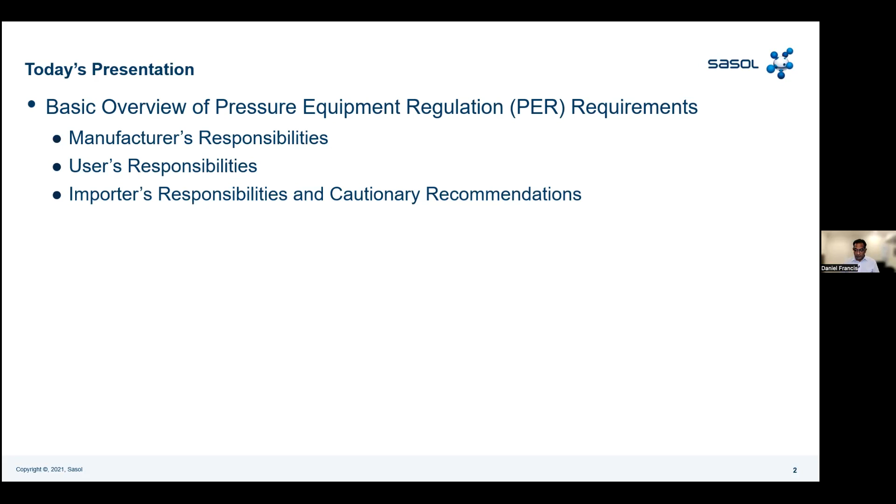And the PER also links to one of the SANS standards, SANS 347. I'll tell you very briefly what those standards cover. We will speak about the manufacturer's legal responsibilities, the user's responsibilities, and also something to note, if you're importing equipment, there are some important accountabilities that you take on the moment you become the importer. So we'll speak briefly about that.

So one of the main reasons for the presentation, of course, is to take you through some of the major changes in the ASME Section 8 pressure vessel code and how that affects the qualification of design professionals and how your responsibilities would be affected there. I would also speak to you when we're speaking about the code changes

about a representation that we're making to the Department of Labor. So just to give you some background, the pressure equipment regulations in South Africa is developed by the Department of Employment and Labor. And they have a forum in which they consult the industry for comments on that. And they take recommendations from the industry as to what should be in the regulations and what might be affecting the industry. And SAIMechE has representation in that pressure equipment forum, and that is actually me.

SAIMechE has nominated me to represent all of you in that, so you do have representation there. This presentation also gives you an introduction to the fact that if you have questions or recommendations regarding those regulations, you can contact the Department of Labor directly, or comment on their drafts. But if you'd like us to address something as an industry, contact me and we can represent that to that forum for you.

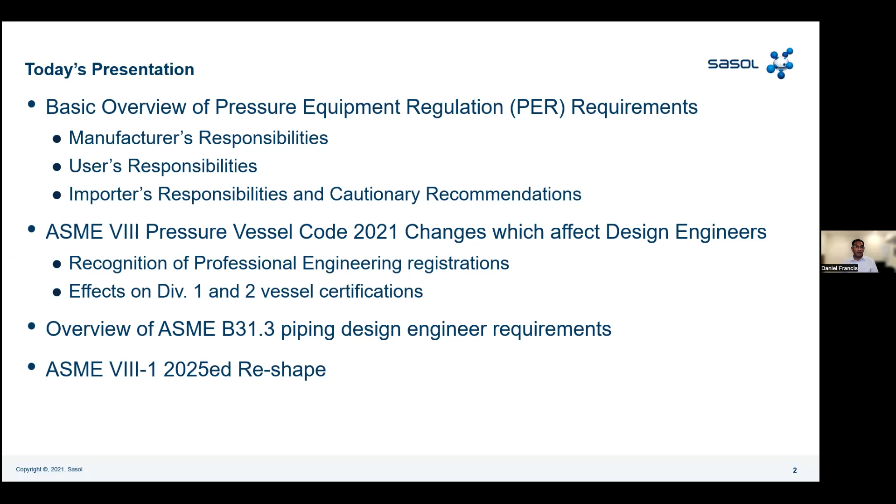Pressure equipment does not just cover pressure vessels. There are also some responsibilities for piping design, and I'll speak very quickly about those in ASME B31.3. Then in 2025, ASME Section 8 Division 1 is going to go through a reshape. Actually, the reshape effort is happening right now. I participate in most ASME development committee meetings, so I'll be able to share with you today some things you should be expecting, especially for those involved in the fabrication industry or engineering consulting industry, or who work for operators that have pressure equipment in your plants. You need to take note of some of the changes coming, because it does affect the way we'll be doing business going forward.

Before we get into the standard, I'll tell you one of the reasons we want to be paying attention to pressure equipment, and why engineers need to work together. Engineers from different disciplines need to work together in our plants to ensure safety.

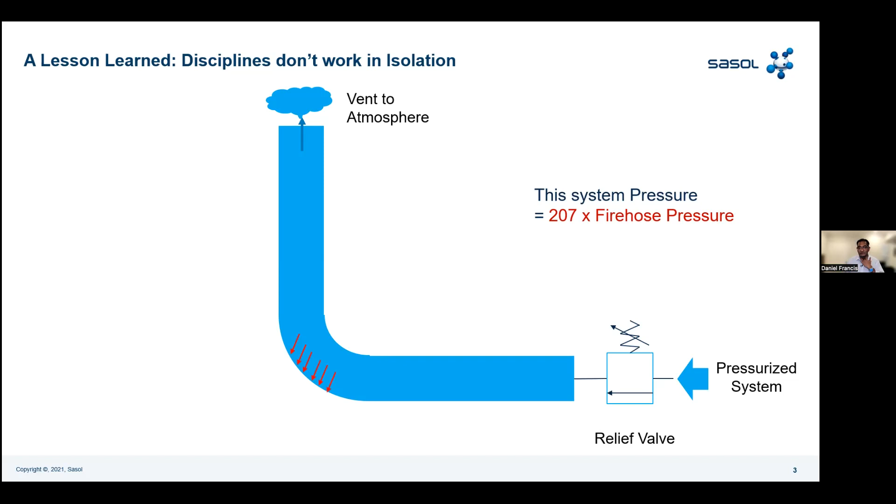You can imagine that when that relief valve opens, at this bend there would be substantial forces induced by internal pressure. You'll have a pressure drop over that pipe, because you're going from a high pressure system to atmosphere. In this particular case study, the equivalent pressure in that system was similar to having 207 fire hoses, or the pressure inside 207 fire hoses - that's the magnitude of force that would have had to be sustained in that area. The number of firemen you'd need to hold a hose, times 207, is the personnel you'd need on site for that.

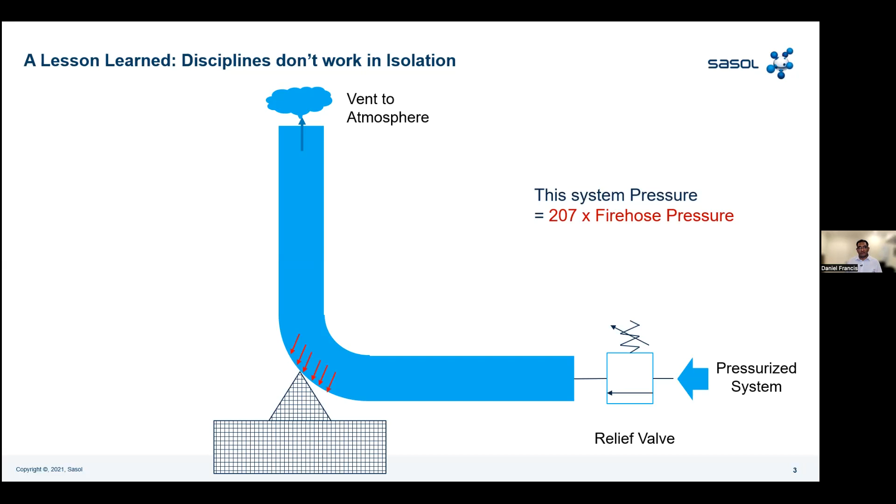But of course, that force is sustained by a structure. Unfortunately, what happened in this instance is that the structure needed to support that force was substantially under-designed. Why? Because the force calculation was not accurate. Generally, the force calculation for such a system has some industry standards to calculate to, but if you have a change in phase of the flow during depressurization, you may have to get more complex in the type of analysis - we may have to do CFD analysis. This is where process engineers interact with vessel engineers, piping engineers, and structural engineers who design the steel support structures.

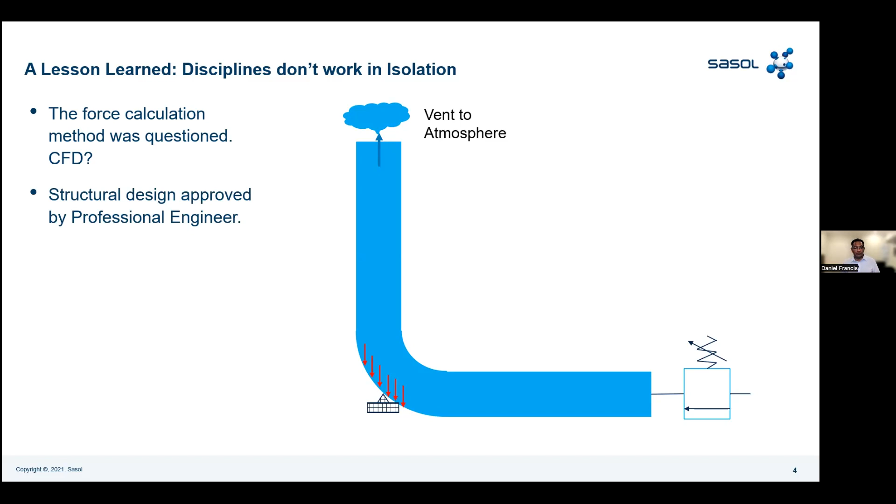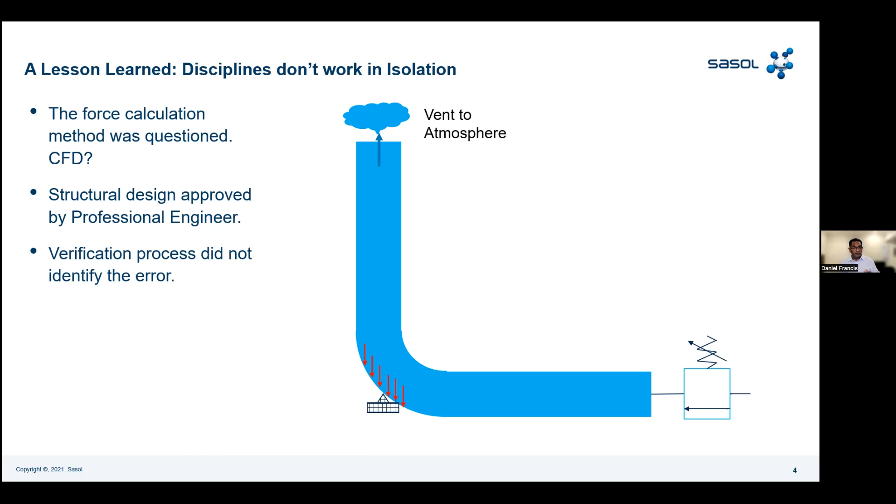We found in this case that the whole design of that structure was approved by a structural professional engineer. However, the verification process within that company - usually an engineering contractor has someone who performs the design, reviews the design, and approves the design, so at least two or three people are involved, and often there's a third-party review as well - none of those processes picked up the error.

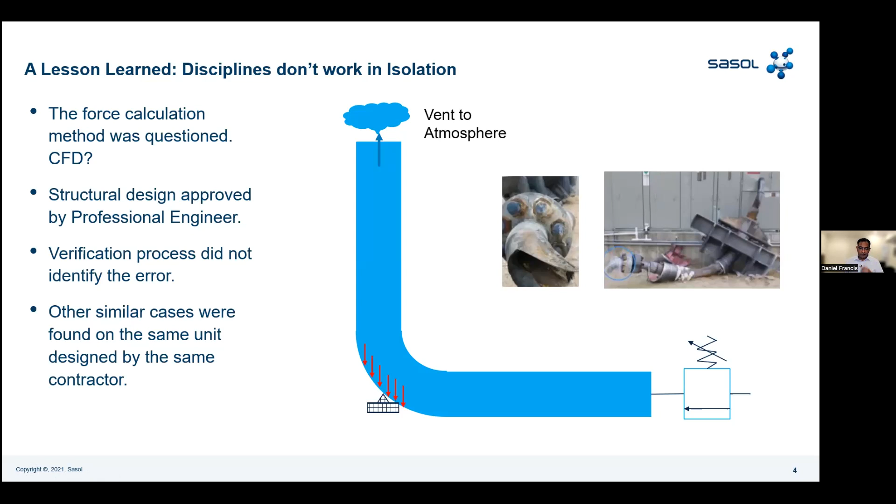So when the design review was done of that plant, we actually found that that same engineering contractor made the same mistake on other plants. They just had not had pressure relief to the extent that this plant had. And you know, a very important lesson there for engineers to work together when it comes to pressurized systems.

All right, so let's get stuck into some of the requirements of the pressure equipment regulations. Firstly, what are classified as pressure equipment?

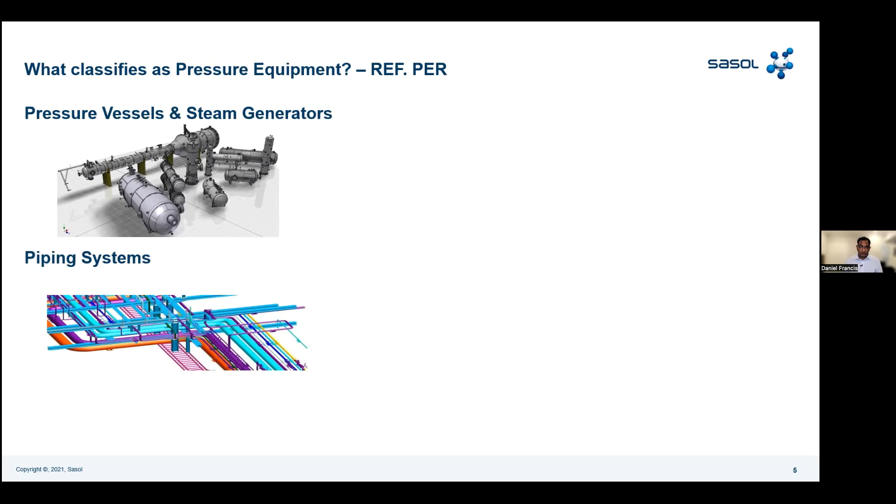Obviously, pressure vessels and steam generators. Steam generators are also referred to as boilers. Piping systems are also pressure equipment. Pressure and safety accessories are included in the definition of pressure equipment in our regulations. And they do include heat exchangers, fired heaters, storage vessels, transportable and bulk containers, fire extinguishers, and accumulators.

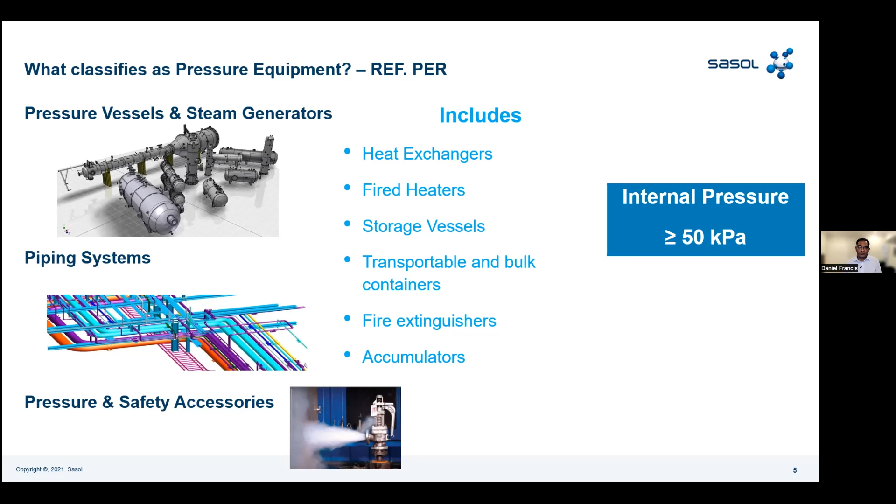In general, if your equipment has a design pressure greater than 50 kPa, it's going to be classified as such. Currently it's greater than or equal to 50 kPa; in the future it will be changed to greater than 50 kPa. If you have a pressure greater than that value, then you effectively have a pressure vessel.

It does exclude certain things, like engines that have a different primary purpose. Hot water geysers smaller than 450 liters are not considered pressure equipment - you don't have to be concerned about the geysers in your homes. And then pressure equipment under external pressure or vacuum conditions only are excluded from these definitions.

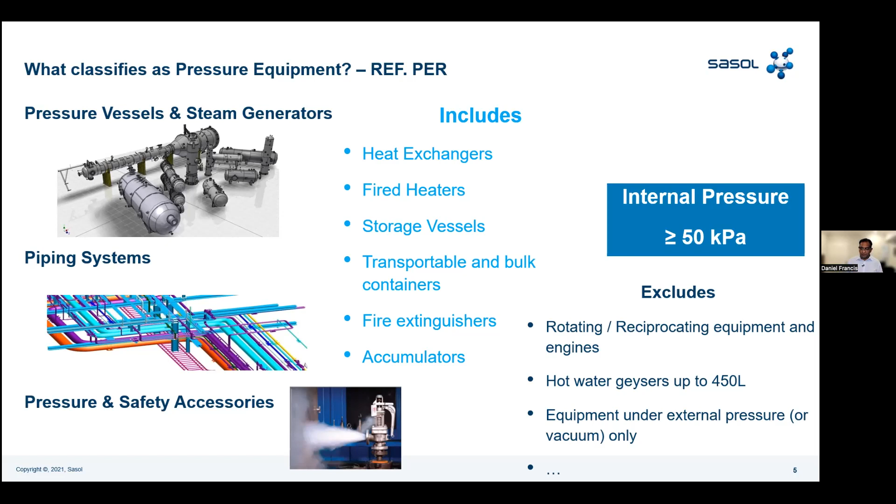Effectively, those are the types of equipment - anything with an internal pressure greater than 50 kPa, and if it's not specifically excluded. There are some more exclusions; I just highlighted the major ones here. But those are the things that are classified as pressure equipment.

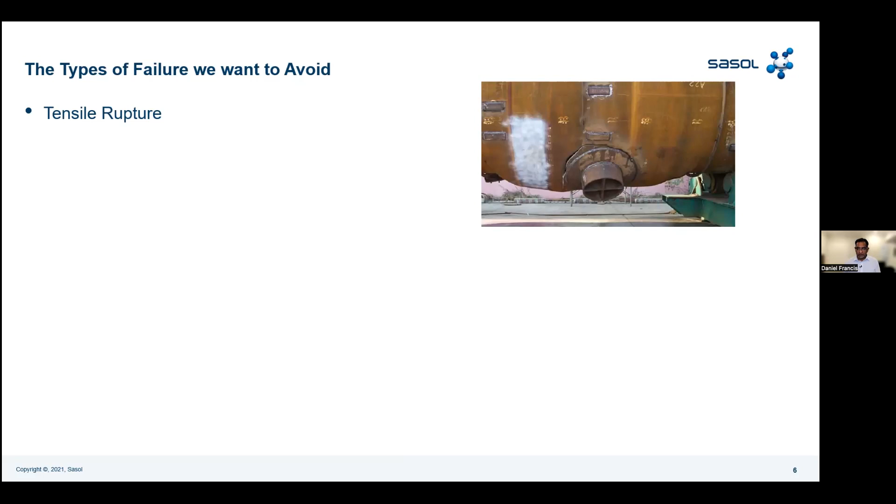Why are we concerned about pressure equipment? Well, the case study we discussed earlier is one reason. But we want to avoid failure mechanisms such as tensile rupture. You can see in this picture where equipment was substantially overpressurized and you have a tensile rupture. Fortunately this was not something I was ever near, but compressive or buckling failure under compressive stress is also something we want to avoid.

A nice picture there of a brittle fracture, where equipment was embrittled during service due to service conditions. And when it was shut down for maintenance, they did a pressure test on it, and the metal had embrittled such that the pressure test caused this type of failure. It's a very clean type of brittle fracture, completely irreparable kind of thing.

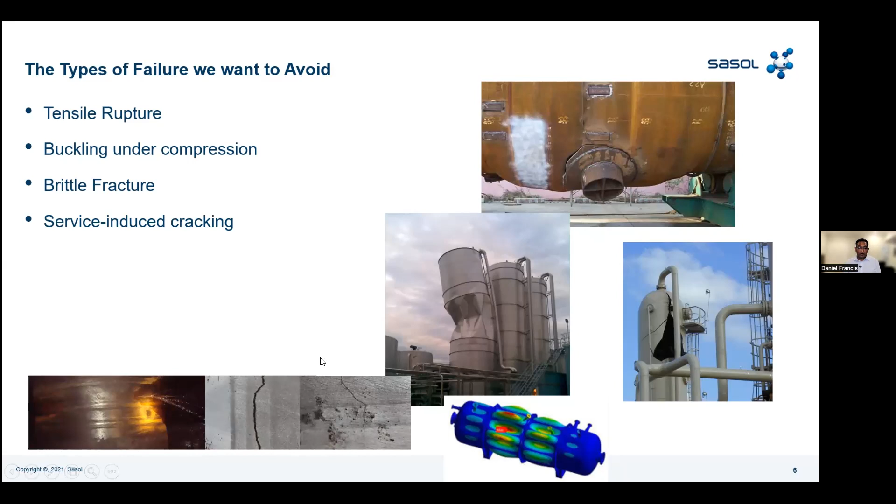We want to avoid that, and pressure vessel codes do have rules to help you avoid that. In-service cracking - if you have things like stress corrosion cracking on pressurized equipment, you could have a progression of cracking over time, and you want to avoid those things. Metal loss, relatively easy to understand - corrosion or erosion. And then we want to avoid manufacturing defects and any kind of leakage, even in flange joints.

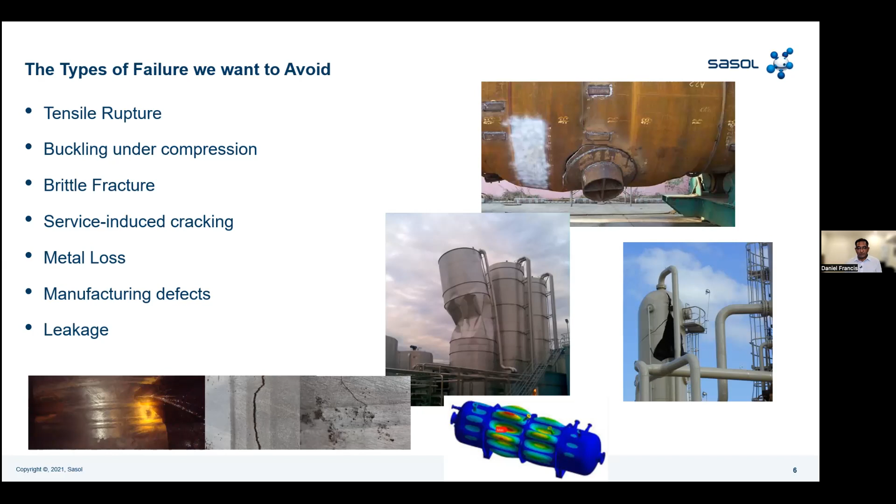We want to regulate pressure equipment so that we don't expose the public to dangerous product effectively - not just the public, also the environment.

All right, so where do the pressure equipment regulations fit in? They are part of the Occupational Health and Safety Act. So for those of you who have the OHS Act book in your office, you will find Regulation 17, which is the pressure equipment regulations in South Africa. Pressure equipment regulation does act together with SANS 347. SANS 347 is referenced by the PER, so it becomes part of the law effectively.

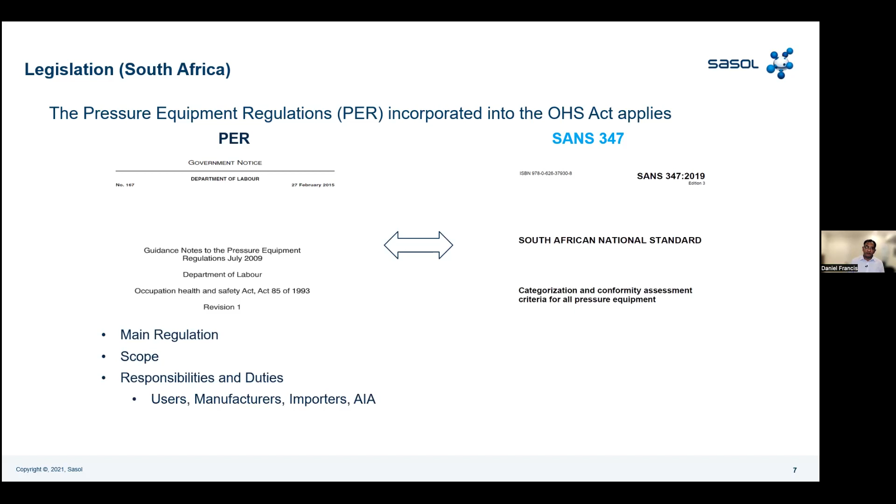What do these two things cover? Well, the PER covers the main regulation. It contains the scope of what is classified as a pressure vessel, where these rules apply and where they don't apply. It does have the main responsibilities and duties of users, manufacturers, importers, and the third party, the Approved Inspection Authority, or AIA. It does cover new manufacture, maintenance, and inspection.

And the PER, importantly, requires compliance to a health and safety standard. So the PER, the regulations in South Africa, do not give you rules as to how to calculate the required thickness of a pressure vessel - that you would get from the health and safety standard. How to weld it, what materials are allowed and what are not allowed - those are contained in the pressure vessel code or the health and safety standard.

In SANS 347, what that standard does is it classifies equipment based on the fluid type, the pressure, and the size.

Based on that classification, there are certain requirements for what it calls conformity assessment. If your vessel is considered more critical based on the fluid, the pressure, and the size, you would have to perform more verifications on it. It's effectively the purpose of SANS 347. It's a conformity assessment document, and whether your manufacturer has an approved quality system or not determines the amount of inspections that are performed by a third party.

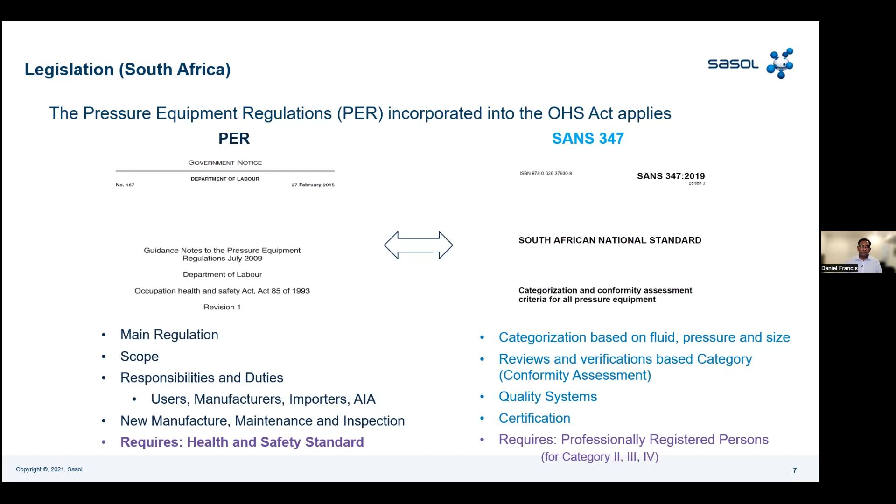But for category 2 equipment and higher, where most industry equipment is actually classified, you need the involvement of a professionally registered person to comply with the local regulations.

I said earlier that the PER doesn't have the rules for your calculations. You need to go to a health and safety standard for that. There are several around the world, and the most common is still ASME, the American Society of Mechanical Engineers. It has several codes - section 1 for boilers, section 8 is pressure vessels, which we're going to focus on a bit today.

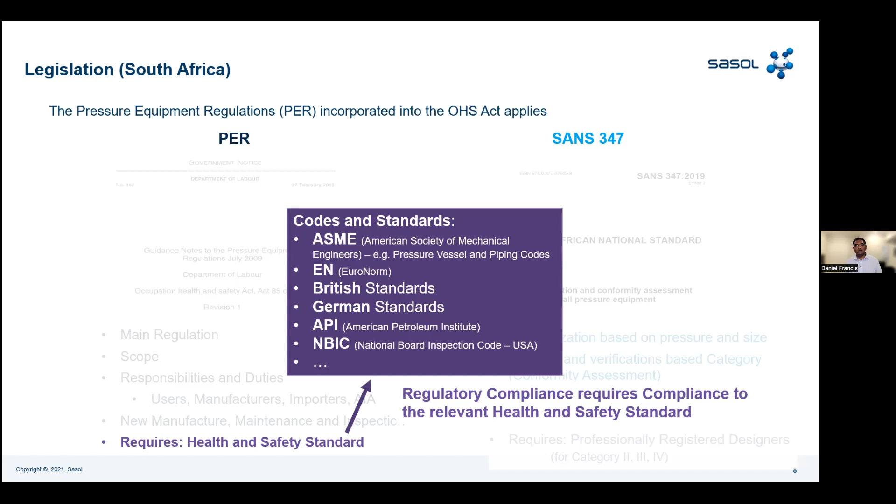The law in South Africa does allow you to design to other standards as well. Ultimately, regulatory compliance does imply you have to comply to the code. So if you have an ASME stamped vessel in South Africa, it needs to conform to ASME. And if it does, then it conforms to the South African regulation, provided all the other requirements of the regulations are met.

Okay, so let's spend a little bit of time speaking about manufacturers' responsibilities. I think this is quite important to cover because it's actually one of the reasons for the way the pressure equipment regulations are structured here. The manufacturer, as defined in the PER, must have or must hold overall accountability, overall control for the design, fabrication, testing, and certification.

Whenever you appoint a manufacturer to provide you with pressure equipment, you should ensure that they are capable of taking on those accountabilities. There are cases where a design contractor or an engineering contractor, even a user, might perform the design themselves and appoint a contractor to manufacture in accordance with that design. When you do that, you have to determine who has overall control of that process.

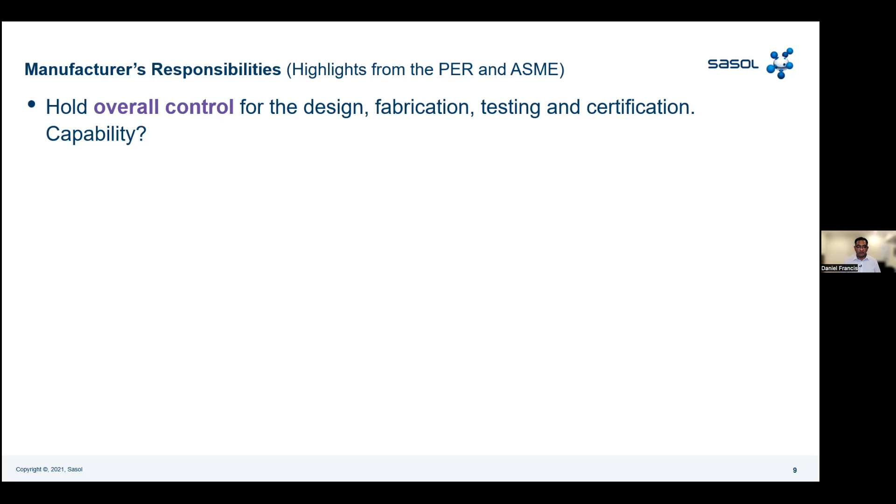And if it is the user or the design contractor that has that overall control, they would be deemed to be the manufacturer. There is some legal accountability that goes together with that.

So one of the responsibilities of the manufacturer is that the manufacturer needs to ensure that the equipment is safe and without risks to health when it is properly used. The user must use it in accordance with the design conditions. However, the manufacturer should ensure that it is safe and without risks when operated under those conditions. It's a simple statement to make, but there's a lot of accountability that goes with that. You need to always ensure the manufacturer is capable of taking on that accountability.

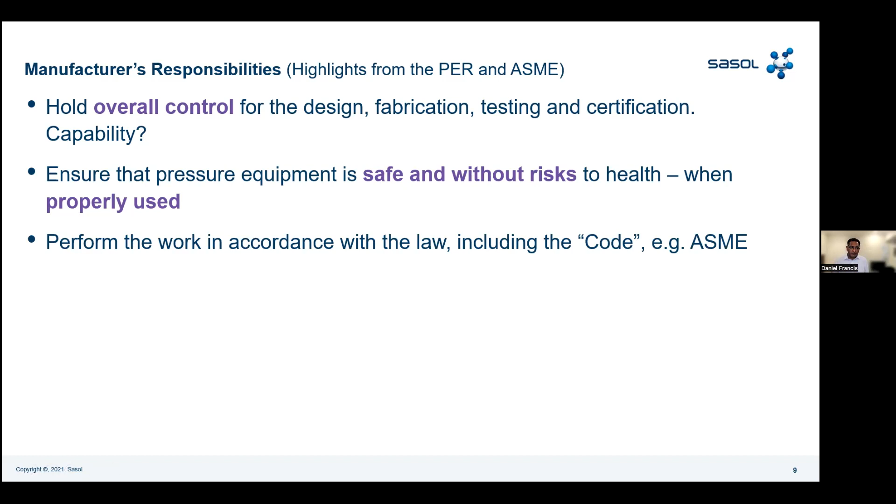So the manufacturer must perform the work in accordance with the law, including the code, which is incorporated into the law by reference. The manufacturer must also appoint an accredited third-party inspection agency to oversee the work. The user can appoint such a party as well, but there must be a third party appointed. In South Africa, we call that the Approved Inspection Authority, or AIA.

And if you're importing equipment, if it's ASME equipment, it'll be an ASME authorized inspector that is the third party. For equipment imported from Europe that is CE marked, you would have a notified body that is the third party. Then the manufacturer must also issue a certificate of compliance that is countersigned by the third party.

One of the responsibilities of a manufacturer is after they release the vessel, if they find defects in it, they need to report that to the user, and together with the user determine some kind of rectification plan.

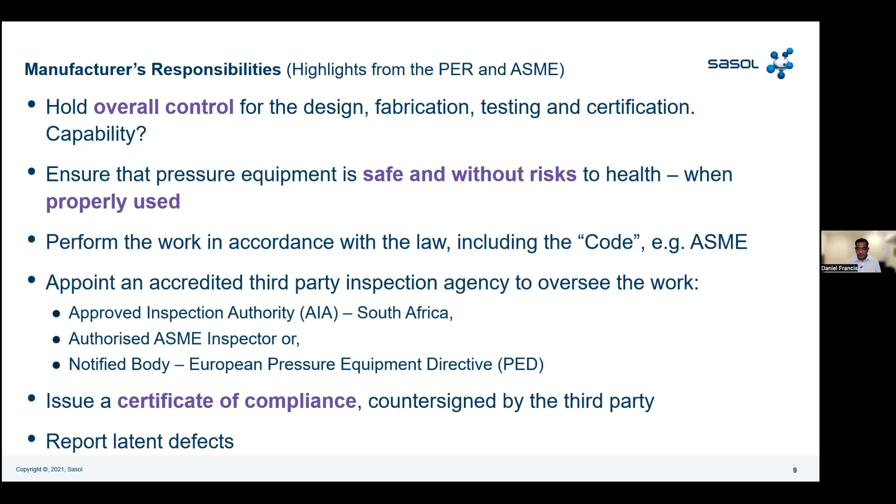Sometimes things go wrong with the manufacturer's responsibility, and I wanted to share this experience with you. This happened on equipment where the engineering contractor expected the manufacturer to comply, and in the same way, all of us in the industry order equipment expecting manufacturers to comply. There are certain things you just do not see, but things do go wrong. So what happened with this particular column?

Half of the column was being replaced. It was going to be cut towards the bottom, and an engineering contractor was going to take that away and bring in a new piece to replace the top section of the column that had undergone some kind of corrosion. So the engineering contractor ordered this top piece of the column from a local manufacturer, who manufactured it, pressure tested it, sent it to site, and it was being installed in the equipment.

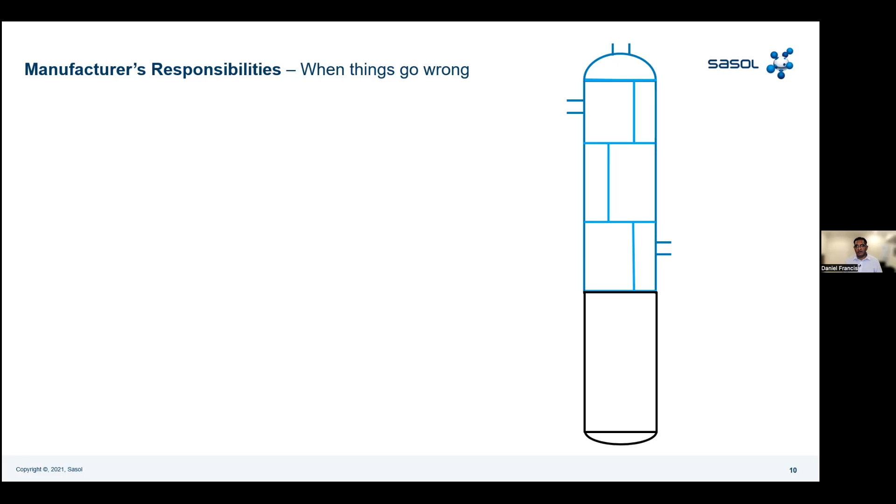While it was being installed, an anonymous whistleblower contacted one of the plant managers and said there were some defects in the weld that were not properly repaired, and the equipment was released in that condition. Let me give you a quick explanation as to what the defect was.

If you look through the wall thickness of this steel, the base material is a high strength steel, and all the strength comes from that. What I've shown here is a weld equipment, or the wall was welded from both sides. On the inside was a low strength corrosion resistant cladding. This is a common type of arrangement where we need corrosion resistance on the inside. It's expensive material, so you use the high strength material effectively to carry your design load. What the manufacturer did is, after they had applied that cladding, they found there were a lot of defects in the weld below.

So they excavated that weld. That's okay to excavate the weld, but after you do that, you need to fill it up with high strength material, because your design thickness is dependent on that strength. However, what they did is they filled up the entire weld with low strength cladding, and effectively the material we had to carry the load was less than one-third of the required thickness, or of that original design thickness.

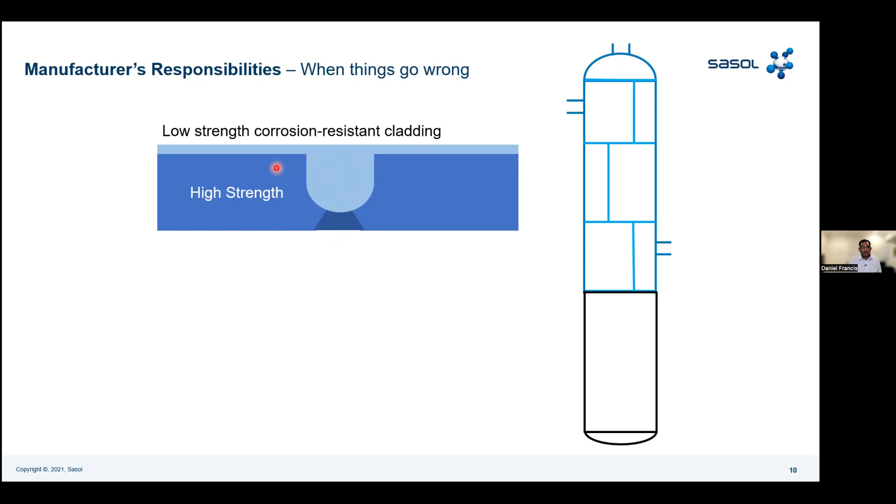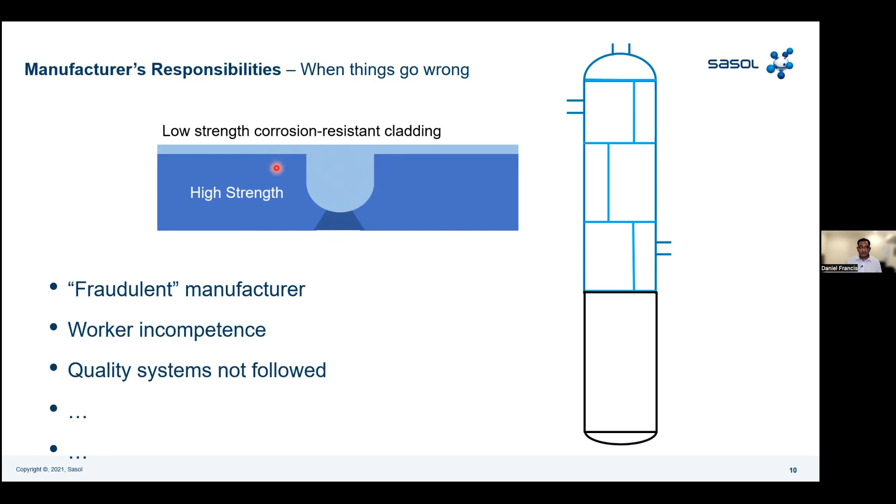So these things do happen in industry. Of course, a lot of repairs had to be done. I guess we can call it a fraudulent manufacturer, worker incompetence, quality systems not followed - a whole host of things went wrong. Unfortunately this does happen in the industry, and you never know when a good manufacturer might stop being good like you knew them to be.

I wanted to highlight that we'll speak a little bit later about importers' responsibilities, but I think it's important to note that although the law doesn't require the user to perform any kind of quality management - it requires only the third party to do that - it is in the user's interest to perform some kind of quality management on pressure equipment while it's being manufactured, especially those critical ones.

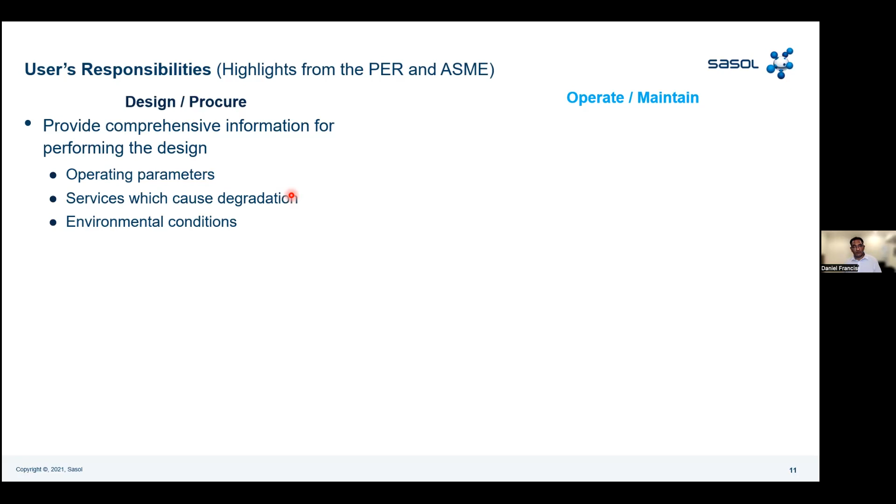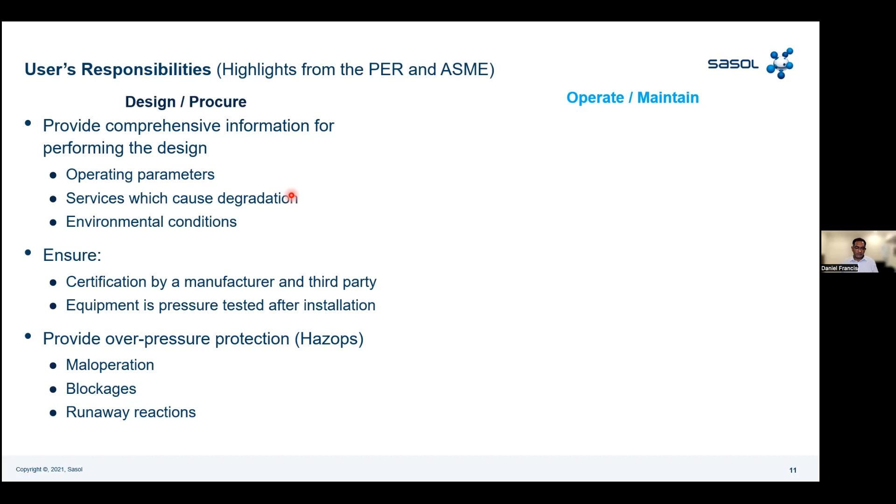The user's responsibilities in terms of the law are to provide comprehensive information to perform the design. The manufacturer cannot perform the design unless you provide him with that comprehensive information - operating parameters, services that can cause degradation, environmental conditions, etc. The user must also ensure there is certification by a manufacturer and a third party. You must have that certificate of manufacture, and that the equipment is pressure tested after installation. The user also provides overpressure protection in many cases, and is involved with things like HAZOPs to determine that the equipment is protected against maloperation, blockages, runaway reactions, that kind of thing. So that's during the design and procurement phase of a project.

But some of you are operating equipment. The pressure equipment regulations require, in that case, that users must inspect and test pressure vessels and steam generators every 36 months. You may replace that with a risk-based inspection program. There are some additional provisions and exceptions, but that's effectively one of the main requirements of an operator.

If you perform any repairs or modifications, you need to appoint a manufacturer, repairer, or modifier that will take responsibility for that and effectively implement all of the other regulation and code requirements during that repair or modification.

There's something else that happens in service equipment, and that's what we call fitness for service assessments. Sometimes there could have been localized corrosion on equipment, and you determine through advanced analysis that it may still operate. There are actually fitness for service standards out there in service inspection codes that refer to fitness for service industry practices you can use to qualify your equipment.

The OSH Act also allows this, the PER allows it. In some cases, I've found that users don't get that design or fitness for service assessment verified by a third party. This is something for you to note - the law does require that it must be verified by a third party.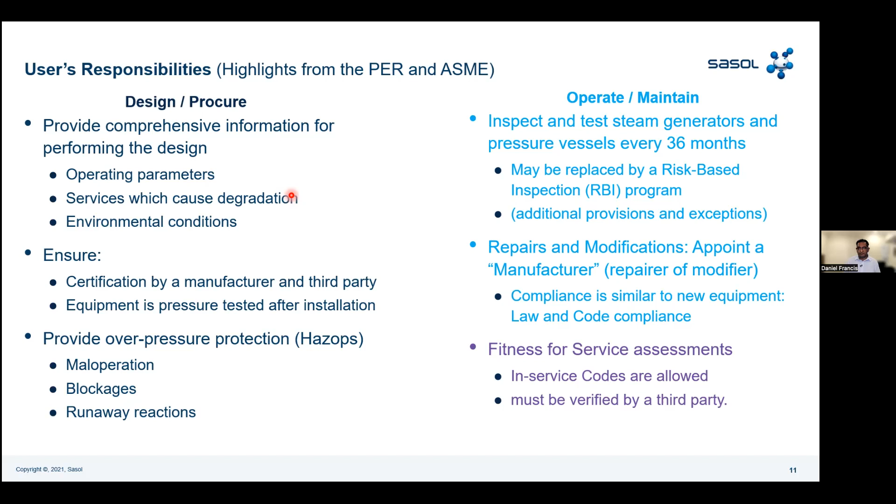All right, that's as far as users' responsibilities go, the summary thereof in the PER. The importer does have responsibilities specifically mentioned in the regulations. The importer assumes the liability of the manufacturer in terms of the pressure equipment regulations.

What this means is all those responsibilities that we saw earlier of the manufacturer, for example, ensuring that the equipment is safe to use and without risks, etc. - all of those responsibilities fall on the importer of the equipment. What that means, of course, is if the equipment fails, the importer will have to answer.

And the reason the PER states that is that the law or the regulators want to have a juristic person in South Africa to go to if something goes wrong on your facility. So when you are importing equipment, you need to be prepared to take on that accountability.

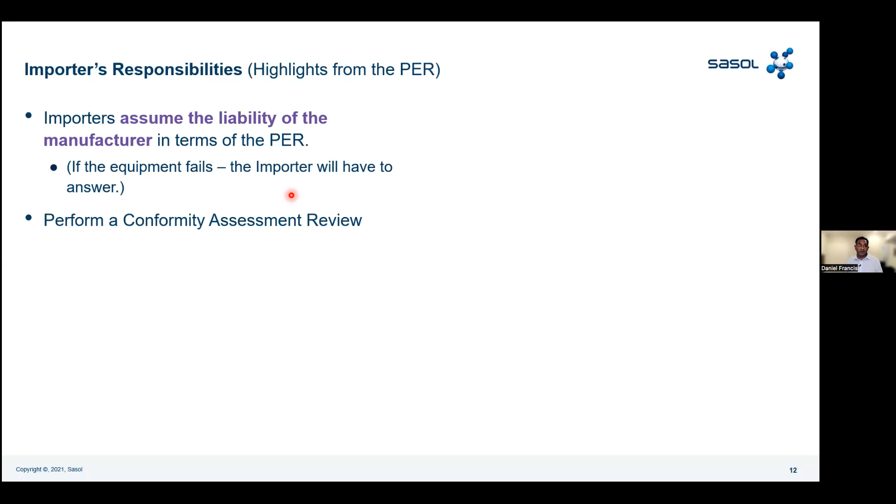How do you do that? Well, you perform a conformity assessment review. You'd also have to appoint an AIA, approved inspection authority in South Africa, to review that conformity assessment.

I've just put in some notes here as to what we recommend when you're taking on that accountability of the importer for such equipment: appoint only dependable manufacturers, perform 100% document verifications, at least document verifications, and align on all technical requirements, including frequently omitted code requirements, with the company manufacturing equipment for you that's located outside of South Africa.

You also perform critical physical inspections. Go to those manufacturers for critical equipment and arrange for frequent inspections on those critical aspects.

Appoint local independent inspectors when that makes sense. Sometimes you can't be there all the time, but you can get a third party and appoint an inspector in whichever location around the world. Also consider random checks, sometimes which the manufacturer might not expect.

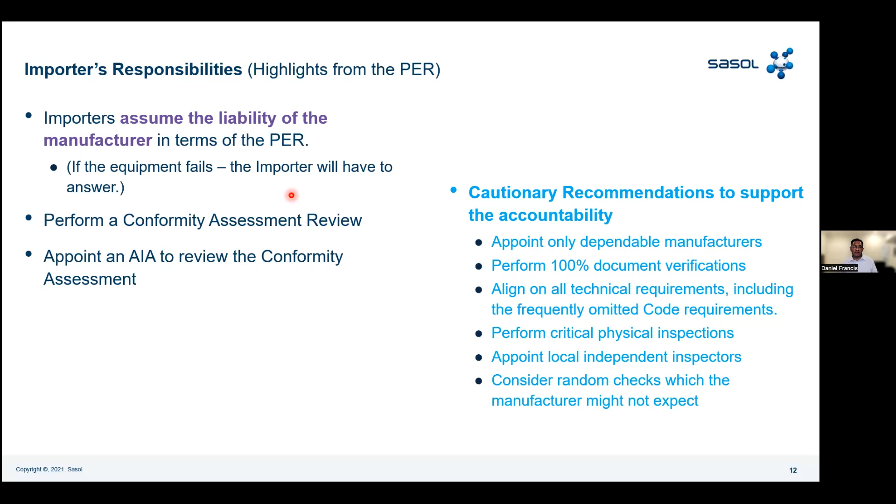I've done that on several occasions - we had critical equipment in India, and I would pitch up at the manufacturer during the night shift, make arrangements to get to the site with the third party that we had there, and just go there and ensure that they are following procedures even at night, because that's when things sometimes go wrong.

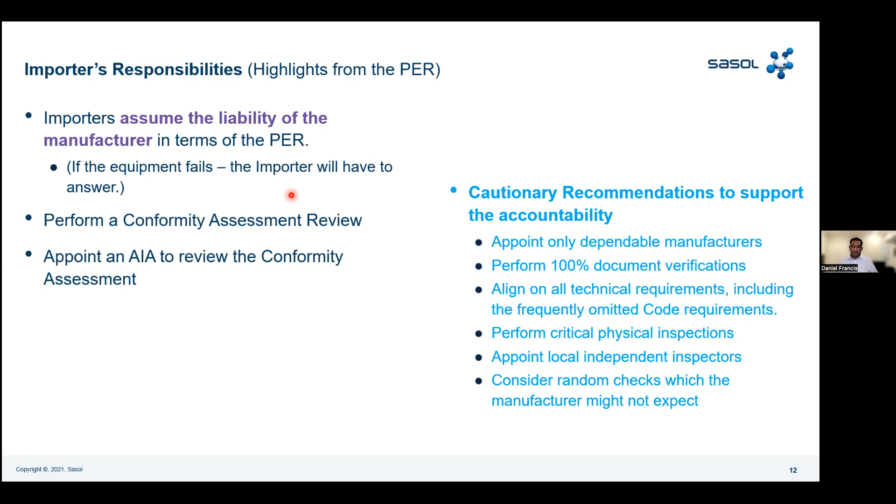So those are responsibilities of the importer and some recommendations as to how you can mitigate some of the risks you face when you take on those accountabilities. As professional engineers, let's do the right thing and ensure that we don't just rubber stamp importer conformity assessments, but that we have some level of confidence, especially when we have critical equipment.

All right. I've listed here some of the common pressure equipment health and safety standards. Under ASME, Section 8 pressure vessels is what we're talking about today, and the responsibilities of design engineers there. There's Section 1 for boilers, and there's several other sections, by the way.

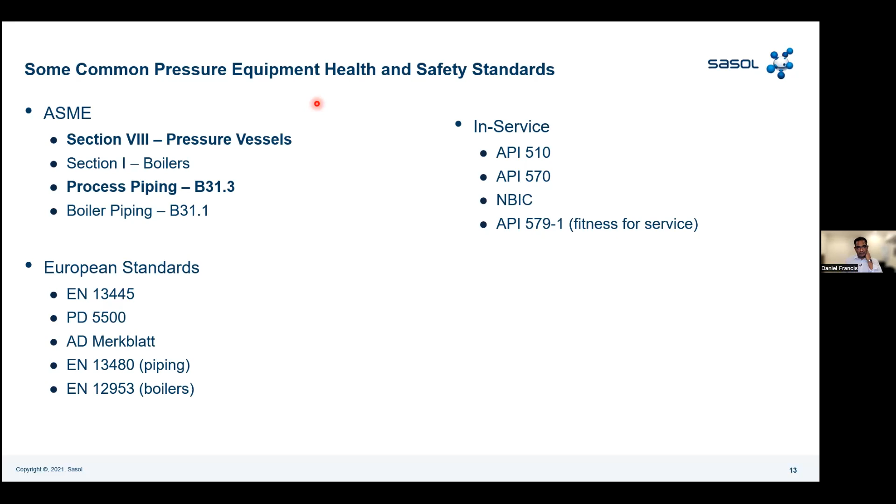Process piping is covered in B31.3. Now, Section 8 and B31.3 are the two common codes that actually refer to qualifications and experience requirements for designers. And this is the reason I've put them in bold, and we're going to speak about that. I've listed the other standards there that you might be familiar with - they don't have specific requirements for designers, but these ones do, and we're going to speak about that today.

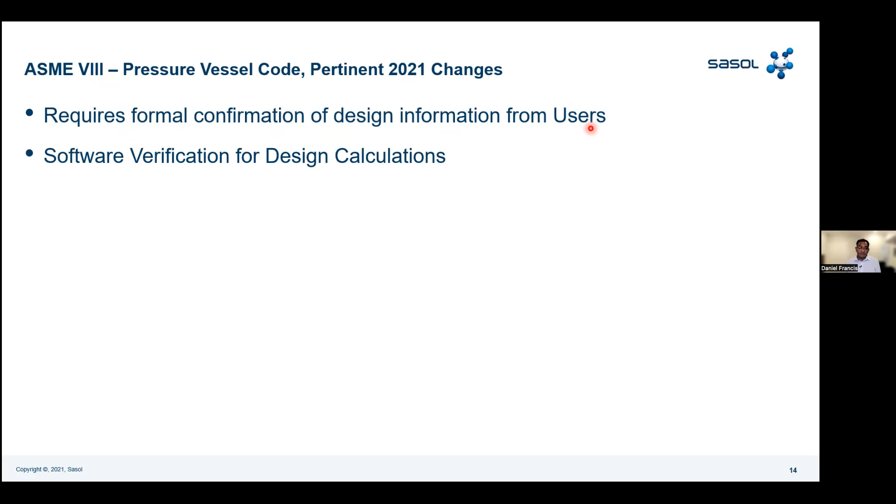The pressure vessel code has some very important changes we wanted to highlight. Firstly, in the past, Section 8 Division 1 never required a confirmation of design information from users, but since the 2021 changes, it does require that. There's also a specific requirement for software verification of design calculations, and another change regarding the qualifications and experience of designers.

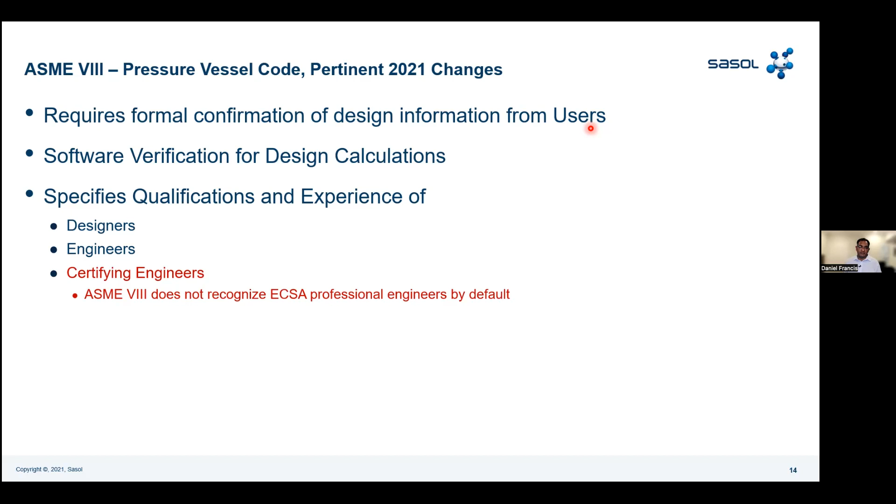It breaks design authority into three classifications: designers, engineers, and certifying engineers. Designers and engineers have effectively the same design authority, but depending on their qualifications, they may be called designers or engineers and require different amounts of experience. Then there's the aspect of certifying engineers. Some aspects of design may only be performed by what the code refers to as certifying engineers, and unfortunately, ASME does not recognize ECSA registered professional engineers as certifying engineers. You need something else, but we'll speak about that too.

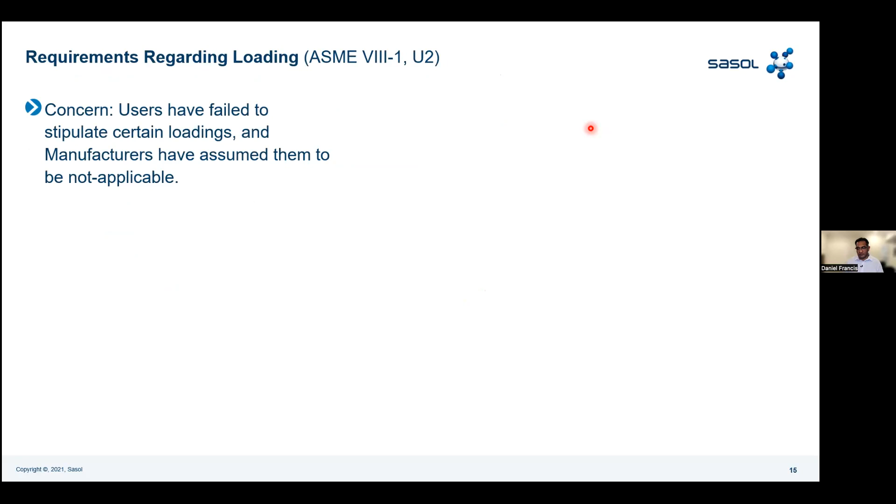So why did the code introduce the first change? There were issues with users failing to stipulate all design conditions, and manufacturers assumed there was no such design condition to take care of, so the equipment was not designed for those conditions. Now there has to be some kind of approval of that.

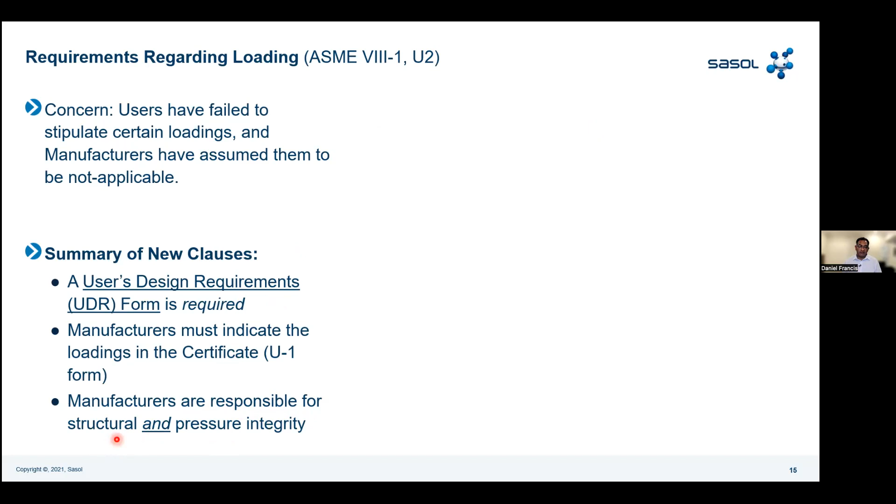In summary, there are new clauses in the code that require a user's design requirements form, or something equivalent, to be completed. The manufacturer must then state that he has conformed to all conditions stated by the user. And there's something added here: manufacturers are responsible not just for the pressure integrity, but also the structural integrity of equipment. That's what ASME says now.

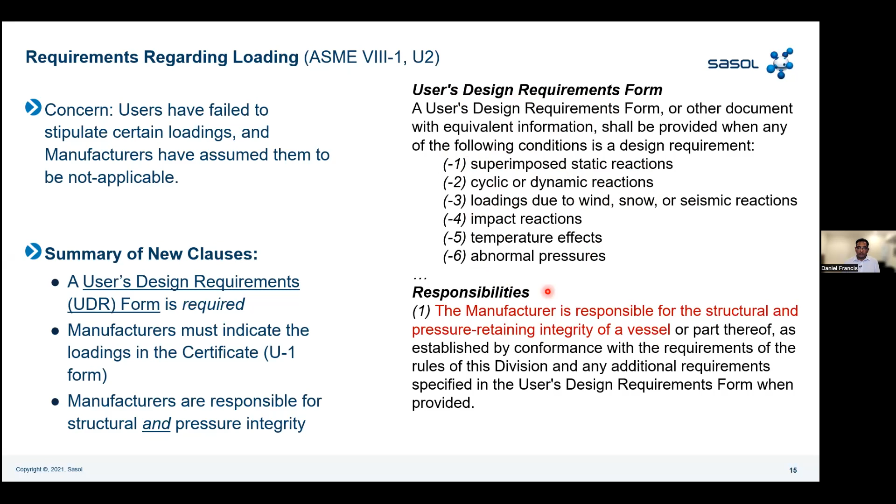There are some extractions I pulled out here, with the reference in the title for those who work with these codes. It's in U2, and the user's design requirements form must be filled in if you have any of these conditions. We found this applies basically to all vessels, because you always have some reactions, for example from piping, wind loads, or seismic reactions to take care of. Under those conditions, you need this user's design requirements form approved by the user, and again, the manufacturer is responsible for the structural and pressure retaining integrity of the vessel. Important change for design engineers to take note of.

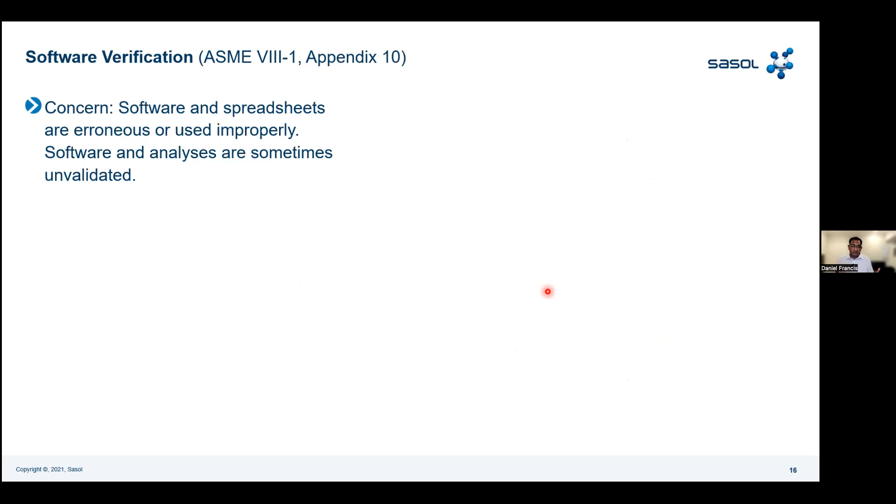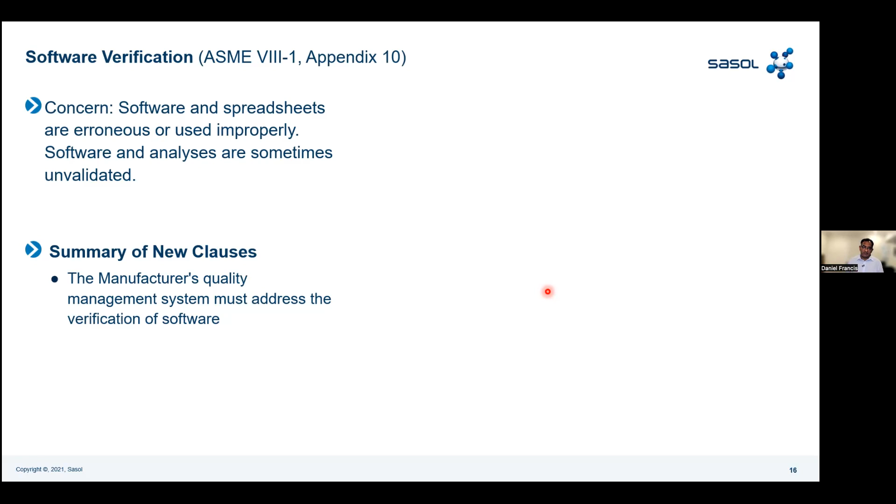The code, in Appendix 10, also requires verification of the software. What's been found in industry, and what I found myself when auditing manufacturers, is that manufacturers use software and in-house spreadsheets that have errors and were never properly verified, or revision control is not properly managed. Sometimes the software is just never validated at all. I've asked manufacturers what code they perform the calculation to, and instead of saying the ASME code, they say they use PV Elite, for example, one of the pressure vessel software packages out there. So the code now requires that all manufacturers must have a quality system that addresses verification of software.

I've pasted some of the wording from the code here. Prepared calculations or analysis must be verified as follows: it must be verified to show that it produces correct solutions for the encoded mathematical model within the defined limits of each parameter employed, and the mathematical model shall be verified to show that it produces correct solutions to the physical problem. Some onerous requirements there for manufacturers to ensure that the software they're using is verified, and I always ask manufacturers for their verification when I perform an audit.

If you're involved with supporting a manufacturer, work for a manufacturer, or order from manufacturers, you should ensure this is in place. The good manufacturers I audit, if I ask them for verification of their software, pull out a file showing the revision and version of the software they're using, which corresponds to the software installed. They've also run several cases of pressure vessel designs where the software results are verified, and they keep that filed for every update of the software installed on their systems.

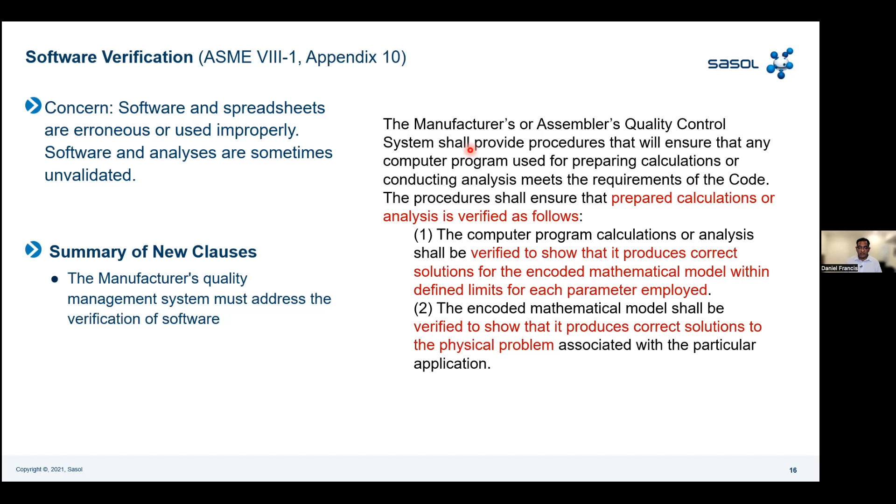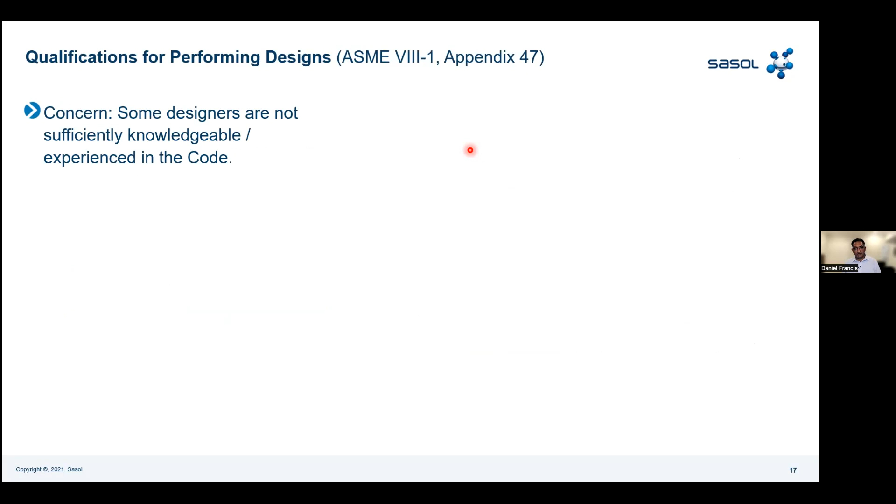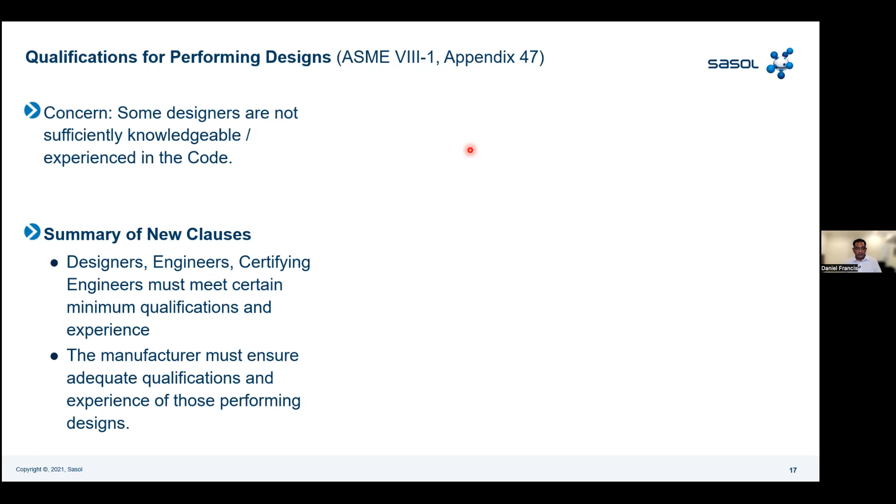Something manufacturers need to now officially take care of. Another major change is the requirement for designers to meet a certain minimum standard. There was concern in the industry that many designers were not sufficiently knowledgeable or experienced with applying the code requirements, so there's been some changes. In summary, designers, engineers, and certifying engineers must meet certain minimum qualifications and experience, and the manufacturer must ensure adequate qualifications and experience of those performing the design.

You can, if you're ordering equipment from a pressure vessel manufacturer, ask them to prove to you that they have met those requirements.

One of the things I want to speak to you about is this phrase, responsible charge. The code requires that a designer, engineer, or certifying engineer designated by the manufacturer shall be in responsible charge of the design of a pressure vessel. The person in responsible charge of design activities shall be experienced, and the qualifications and experience required depend on the complexity of the equipment, as we will see later. So this is a nice term to use, that the responsible engineer needs to be in responsible charge.

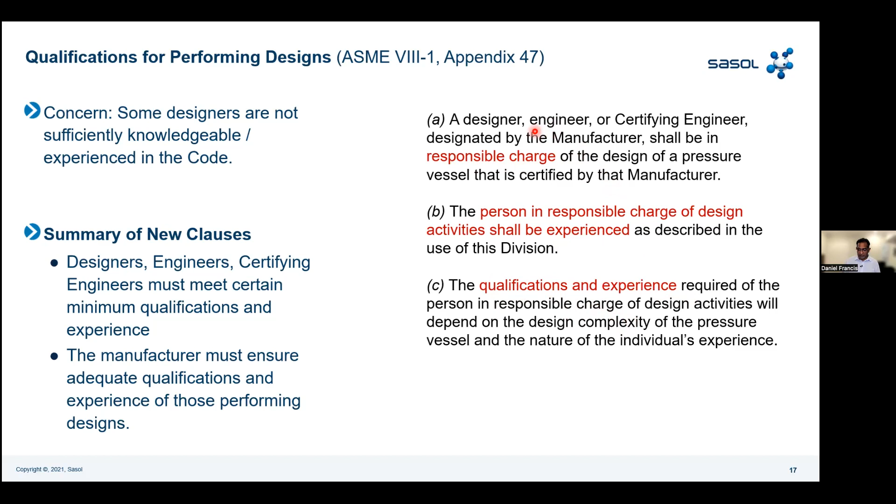It is an industry term, actually, but the ASME code does reference a definition for that. That reference is to the American National Society of Professional Engineers, which has a position statement on what responsible charge means.

I'm just going to read the red bit here that says, a professional engineer in responsible charge is actively engaged in the engineering process from conception to completion. Engineering decisions must be personally made by the professional engineer or by others over which the professional engineer provides supervisory direction and control authority. Reviewing drawings or documents after preparation without involvement in the design and development process does not satisfy the definition of responsible charge. So this practice of having a professional engineer review your drawings and design at the end without any involvement at the beginning does not satisfy this requirement of responsible charge.

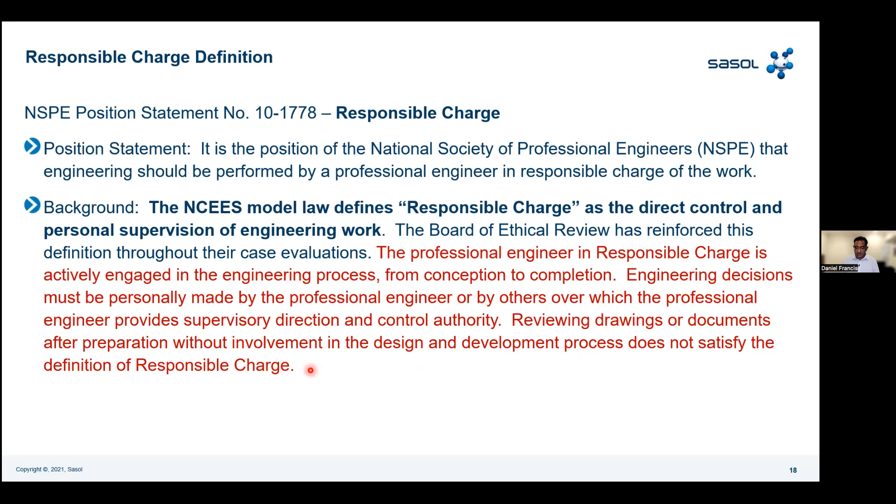And for some companies, I know this requires a change in the way of working. So we do need to take note of that.

I did mention to you that the code currently does not recognize just any certifying engineers. So certifying engineers aren't always required, but when a certifying engineer is required, an ECSA registered engineer is not accepted or recognized by default. I've put on this page some of the different types of registrations and the experience one would have to have to be recognized by ASME as a certifying engineer.

So in the USA, there are several requirements. There are actually 2 exams to be written, the PE exam being the last one that qualifies a person to be registered as a certifying engineer or recognized. In Canada, it's 4 years experience in addition to the bachelor's degree, but you also write a professional practice exam.

And then there's the international register. The international register requires a bachelor's degree, and it requires 7 years of experience, and 2 of those years need to be in responsible charge or fulfilling that kind of role. If you are an ECSA registered engineer and you meet those other requirements, you can register to be on the international register. It is not automatic; it is a separate application that you need to make. You pay a certain fee, I think, initially, and you get onto that register after you go through that application process. And if you are on that register, then you would be recognized by ASME as a certifying engineer.

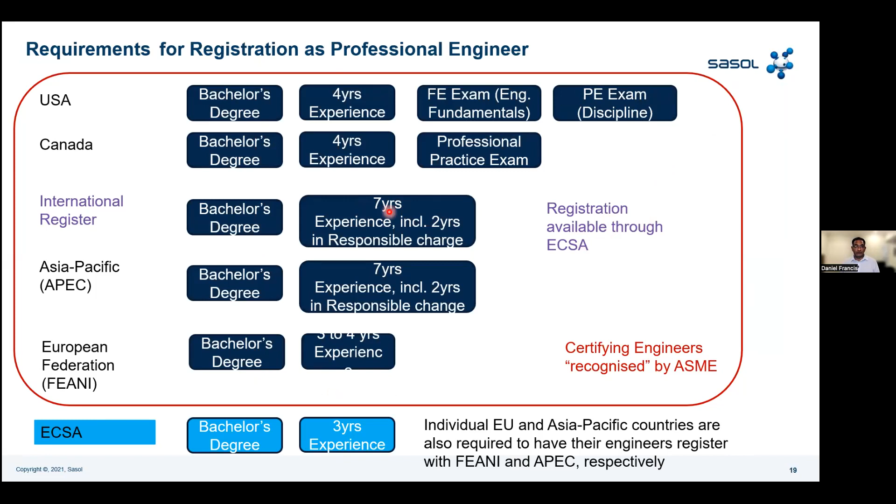It kind of summarizes where a certifying engineer must be involved according to the code, and where we would have difficulty meeting that requirement unless the organization has somebody that is qualified as indicated within this red box. And that is, for example, if you're ECSA registered, you need to go through that additional registration and be on the international register.

All right, so a certifying engineer, if you are a certifying engineer, you can perform all designs in Section 8 Division 1, and you can also perform all designs in Section 8 Division 2, except that you also, for Division 2, you also need to have a written testament of compliance to the ASME Code of Ethics. And with that in place, you can certify all designs. And that is really not very different from the Code of Ethics that you subscribe to when you register as a professional engineer anyway.

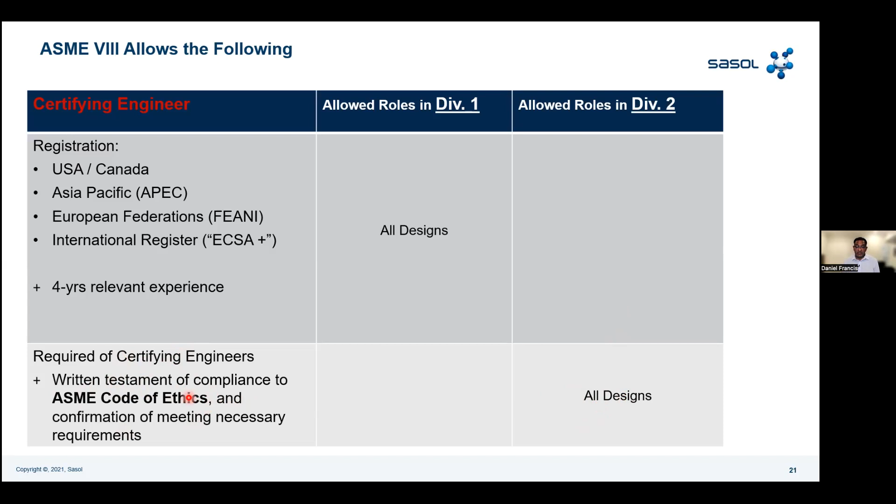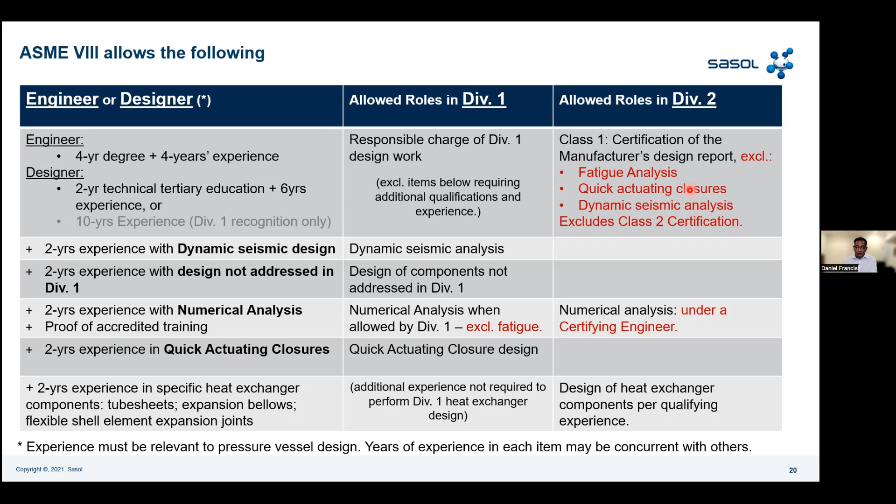All right. These red areas here do present a little bit of a problem for us in South Africa. And I mentioned to you earlier that SANS 347 has a section where it allows equipment to be manufactured in accordance with the ASME in South Africa, although it is not stamped ASME, and we use local third parties, etc. So it has certain requirements that you need to meet, and it allows those vessels in South Africa, and they are stamped instead of ASME, they're stamped OSHA, they're OSHA stamped effectively. So we've made it, we've represented this position to the Department of Employment and Labor.

We've proposed to the Department of Labor that section allowing ASME equipment in South Africa include certifying engineers, so that ECSA registered professional engineers with 7 or more years of experience would be allowed to sign off as certifying engineer. That's a representation we've made. I actually chaired a small subcommittee for the Pressure Equipment Regulations Forum, and everybody basically unanimously agreed with this type of proposal to the department.

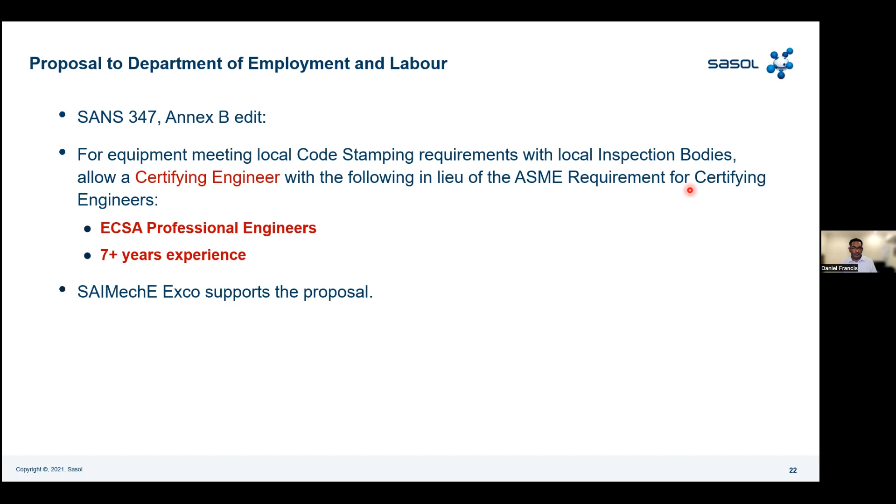Hopefully SANS 347 will be updated in this way. Unfortunately, it is not the case right now, and you have to still comply with the code until this change is effected. That's one of the things we did. I took this proposal through the SAIMechE Exco, and that was fully supported there.

I think some of you might have some questions on that, and we'll take it after a few more slides. Because we're speaking pressure equipment, we've spoken mainly pressure vessels. I know there might be some piping engineers here. I wanted to highlight that if you're designing process piping in accordance with B31.3, there are some requirements for design engineers, but it is not as solid a requirement as Section 8, because the piping code allows the owner to waive the requirements here.

So unless the owner's approval is given, the requirement applies if the individual does not meet at least one of the following. In general, you want to comply with this. This includes completion of a degree accredited by an independent agency - although ECSA is not listed here, I'm sure it would be considered adequate. Professional engineering registration is required, or completion of an accredited engineering technician or associate's degree with a different level of experience, or 15 years of experience if you don't have that tertiary qualification. So this is what the piping code for process piping requires, ASME B31.3, unless the owner waives that requirement.

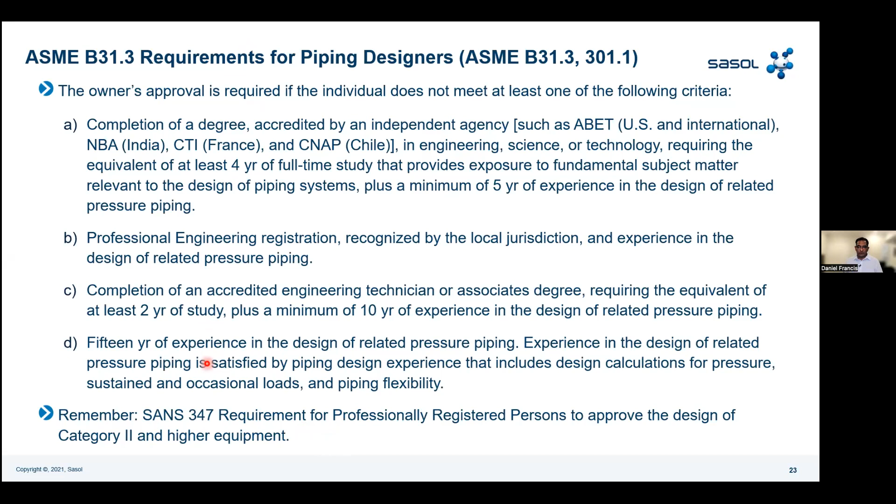But I do want to highlight that SANS 347 does require professionally registered persons to approve the designs for category 2 equipment and higher. If it is below category 2 equipment, the code still requires a certain qualification, and you should ensure that you meet that unless it is formally waived. I don't think many owners will waive that without due consideration.

The last thing I wanted to discuss is a major change happening in the code in 2025. Section 8 Division 1, as I said, is one of the most common pressure vessel codes applied around the world. But the code has been updating Section 8 Division 2 to incorporate the types of vessels that people go to Division 1 for. Actually, the members of the ASME Code Board would prefer that people move to ASME Section 8 Division 2, and by introducing some changes, they're kind of forcing that a bit in the industry. So they're encouraging the move from Section 8 Division 1 to Division 2 through the reshape action happening in the 2025 edition, or starting there.

They say they intend to maintain the ASME Section 8 Division 1 brand for a short run until users move to other options. The common rules support in Division 1 for Division 1 users is actually moving to Division 2. So what they're doing is: Section 8 Division 1 has a design by rule section - actually the whole code is effectively design by rule - while Section 8 Division 2 has design by rules and design by analysis. Wherever Section 8 Division 2 has a rule that looks like the Section 8 Division 1 rule, it's going to be removed from Section 8 Division 1, and the user is referred effectively to Section 8 Division 2.